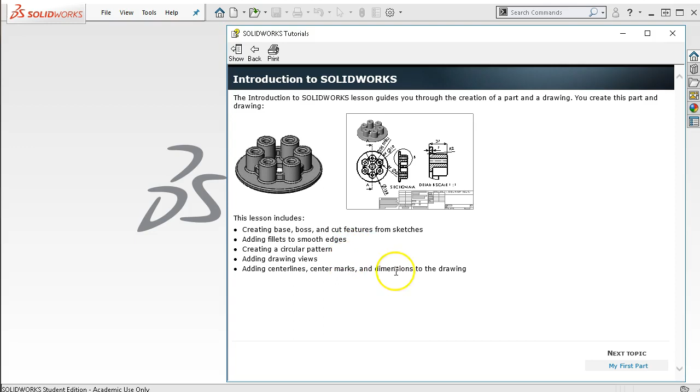The lesson includes creating base, boss, and cut features from sketches, adding fillets, creating a circular pattern, adding drawing views, center lines, center marks, and dimensions to the drawing. So they're going to take it through the process of creating the part.

So next topic, my first part. We're going to select units, pretty much what we've been doing in the lecture videos. Same type of process: units, millimeters, grams, and seconds.

Since we have set up a template, we can go into the millimeters. If you haven't set up a template, then you'll need to set to metric. All right, so opening up the part, fly that out of the way, file, new.

And if we're in the part, so let's see, my templates are over here, so there's the part inch. Let's assume that you haven't created these templates yet, so just use part.

And what we're going to check for to make sure that we're in metric is in the lower right corner, which is showing me that it is in inch, pounds, and seconds.

And the pop-up is just off of my screen. Again, with the YouTube 720 by 480, whatever, I'm only using part of my screen, so I hate when things pop up off of the usable area.

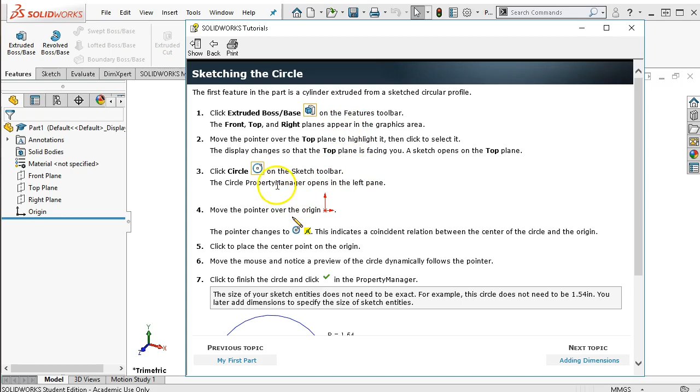They're going to go through the process of clicking on what you want to do, and then the planes come up and say, where do you want to start the sketch? I think my preference is to be in the sketch tab, pick the plane that you want.

All right, so they're saying to move this over the top plane. And then from a workflow standpoint, this is going to be your most efficient: right click on the top plane, go to sketch.

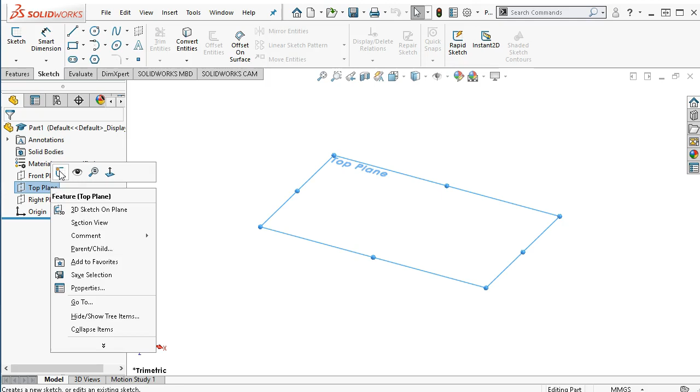Otherwise, we would go to sketch. It would give us the same thing as selecting the feature.

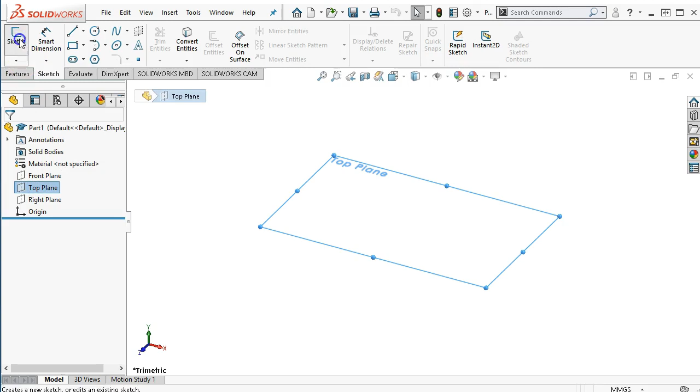And I didn't want the front plane, so I get to exit out of that and just discard the changes. Top plane, sketch would be a fourth way, since I'm throwing them all in here—to get into a sketch is to select the plane or the face that you want and then go to the sketch.

Let's see, is it up here? No. The one thing you'd want to watch if you're using the little pull-down arrows is make sure you're not selecting the 3D sketch.

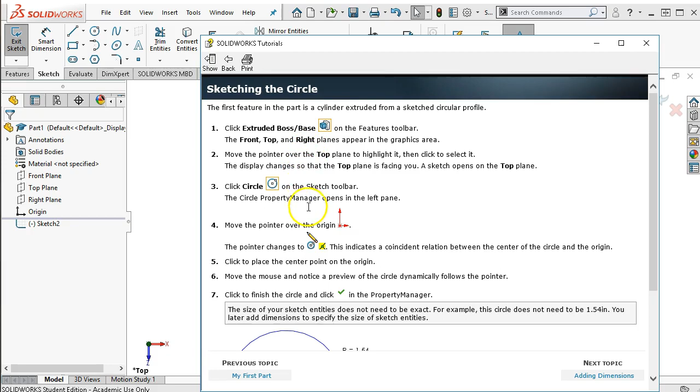They're going to have us go into the circle tool and over the origin. So we're in a sketch, we have the red origin. Long leg is vertical, short leg is horizontal. The pointer changes, showing you some of the sketch relations that you need to be looking for.

And we're going to drag out and then set the dimension later. So their note is telling us that don't worry about the 1.54, drag it some distance, whatever it ends up.

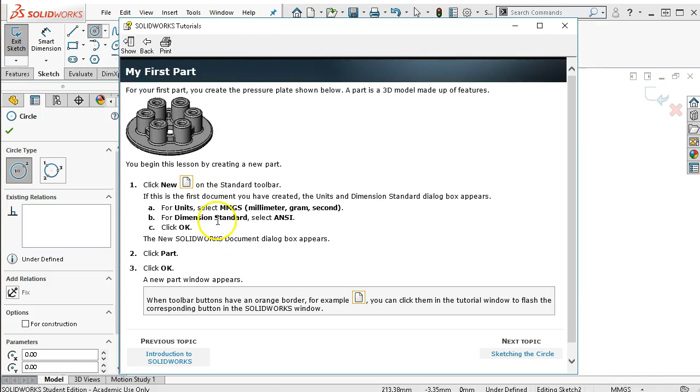And they're showing it in inches after they told us to go into metric. That's interesting, I gotta verify that. For units, select millimeters, grams, and seconds. Either that, or no, it's saying 1.54 inches, so. Alrighty then, editing as we go, proofreading as we go.

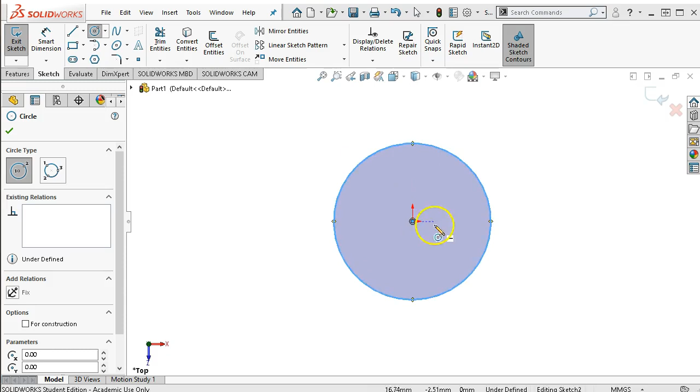Alright, so adding the dimension. Our shaded sketch contours is on, so notice that everything interior is showing us that we have an enclosed region. When we talk about contours and regions, the perimeter, the circle itself, is our contour, and the interior space that is showing as shaded is our region.

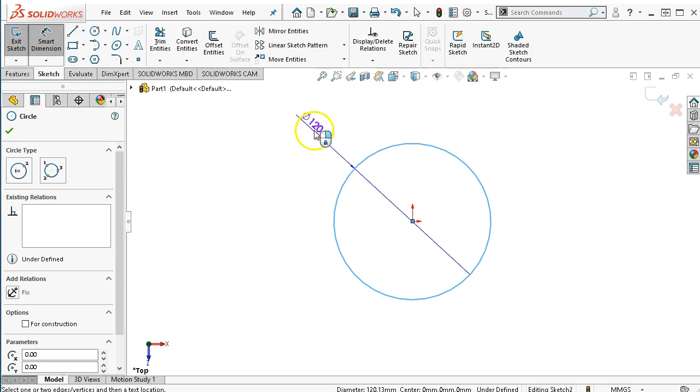I'm going to go ahead and click that off, go into the dimension, and they're telling us to do what I just did: smart dimension, preview the diameter dimension, modify, and 128 millimeters. So guess they did manage to get theirs changed over. Selecting on the circle, watch where you place the dimension because it's going to have some different results. I'm okay with the interior, so 128.

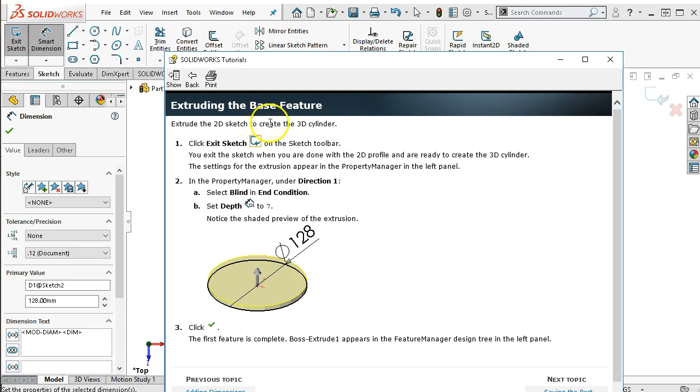Going into the extrusion. You do not have to exit the sketch to get into the feature. You can, and then ready to create the 3D cylinder sketch for the extrusion. If you went in through features, then you're automatically going to go from the sketch back to that feature. It's not always going to be the best selection to go in through the sketch and then directly into the features. So I have to make a little adjustment there.

All right, you exit the sketch and it will take you automatically into the feature. Since I did not do it that way, we're going to come over to features, go into the Extrude Boss Base. This will put me in the same location. And when they refer to the property manager, they're referring to everything on the left, so all of the parameters will show up on the left side. My screen may chop some of them off if I run out of room.

Under direction 1, we're doing a blind condition. And then setting the direction, it's going up, but it could also go down. So in our relation with the top plane, we would be in X and Z, so negative Y, so to speak. But it's not even having to do with the axes. It is more, are we going in a positive or negative direction from the plane that we are sketching in.

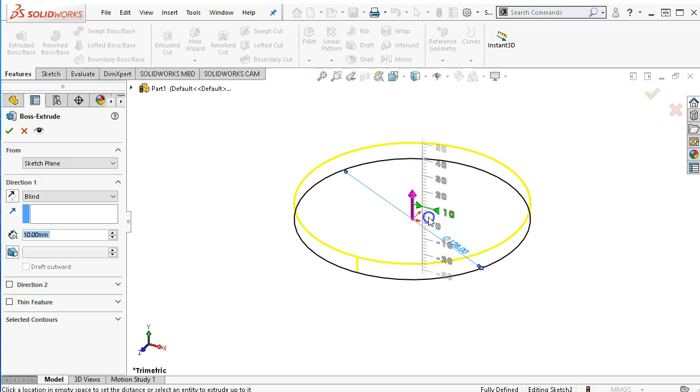So I reverse the direction again. I see that the arrow is going the right way. I can also grab that arrow and drag. Do not spend a lot of time dragging to an exact number. They want 7. But if you go closer to the scale, it will reduce one magnitude and get you a little bit closer. I really want 7, 6, 8, 6, 8. Not going to give it to me.

I'm done. All right, so I can either come over and if I double click in the area for the dimension, I can type in the 7 and be done. Most of the time I don't even mess with the scale. We go ahead and accept, and we're ready to go to their next step.

Saving the part. Good idea to save. File name. So this is their intro. They didn't, so pressure plate. And I'll go ahead and put this in my assignments folder. I don't really have an assignment for it, but we'll go pressure plate.

Fingers are not cooperating this morning, so save. And just off of the screen, my window is a little bit bigger. All right, fly back in.

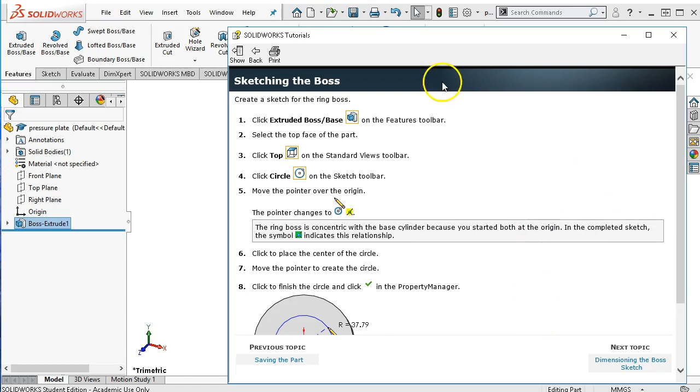Saving after the first extrude is not required. It is a good idea to save often, so you don't get caught. The system has become enough more stable that unless you're doing really crazy geometry, it shouldn't be that much of an issue with the computer locking up or crashing on the SolidWorks software.

If you watched any of my previous videos, you know that I work without a net for the better part of 30 to 40, sometimes an hour time block, and then, oh yeah, I probably should save. Don't do that. Save in regular increments and hit the Control S button regularly to save your parts.

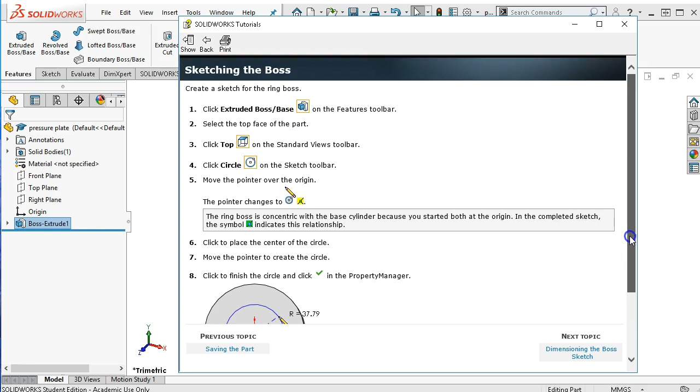Click Extruded Boss Base on the features. They're taking you in again through the feature, and this one is going to be the little raised up portion, so just kind of double checking here. They still want to do that on the top face. Keep in mind that I'm not grabbing the window.

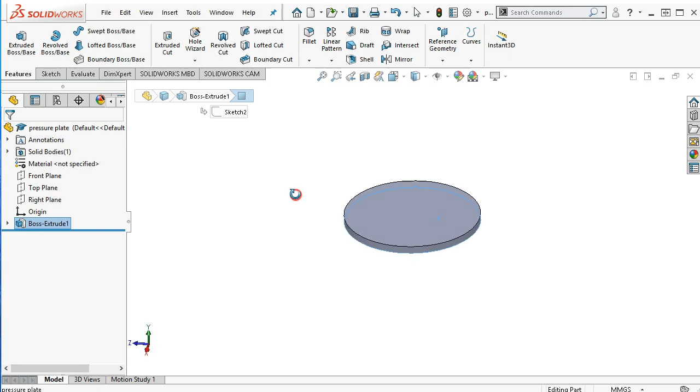If we grab the top plane, that would be the same as rotating over and grabbing the bottom of the boss that we just created. All right, so you have decisions to make.

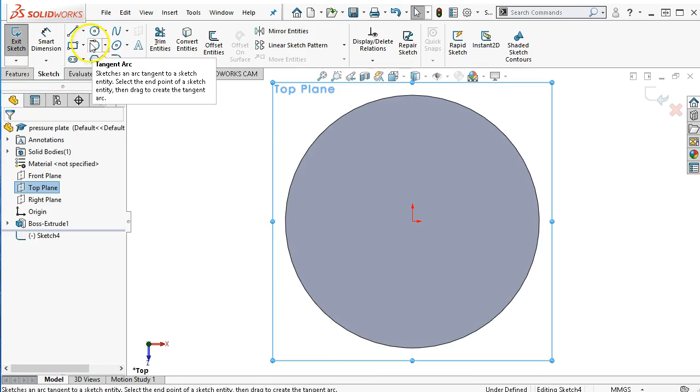I'm going to go with the instructions this time, except my fingers really wanted to do what I normally do, to follow my standard workflow. So, top plane, extruded boss base. We're going to draw the circle, and I don't think I elaborated on watching for the origin.

If you're following along with these instructions, hopefully you pick that up. Once we are hovering over the top of the origin, you're going to see the little yellow box. That is telling you that you're going to get a coincident or a concentricity. And we draw the first one. The ring is concentric with the base at the origin, placed at the center, and you can hit the check boxes.

I don't normally worry about these type of check boxes. I'll just go right into the next command. Smart dimension and 75 millimeters.

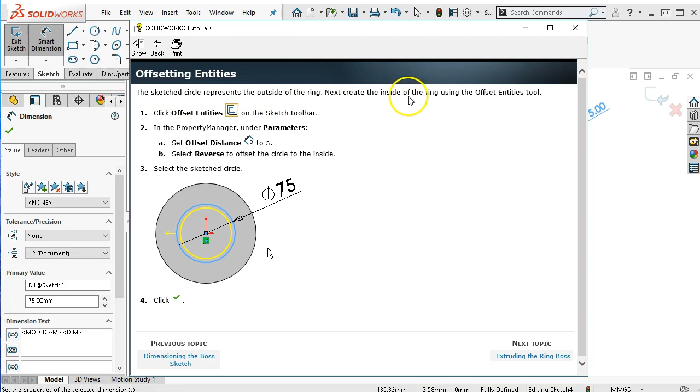All right, so let's go to the next. Double check my instructions. Modify 75. We're going to offset the entities. So we need to make sure that the circle represents the outside of the ring, inside ring using offset entities. And we need to make sure that the circle is selected.

All right, so right now I'm seeing black. I applied the dimension. If I go back to select or I hit escape, then the circle isn't highlighted. So I think that will be an issue.

Maybe not. Let's go ahead and offset entities, and we're going 5 millimeters. And nothing really happens. So even in their picture, they're showing the circle in blue. You only get that blue when it's highlighted.

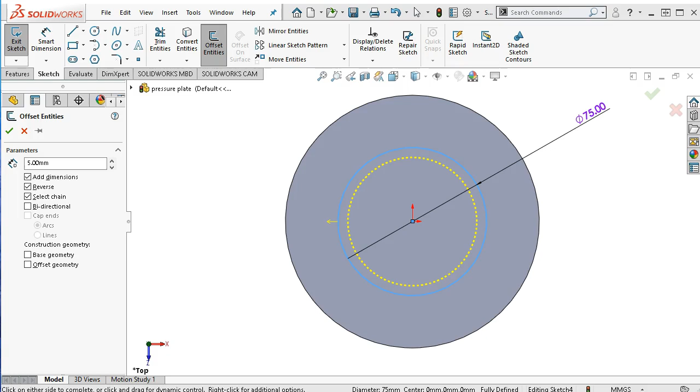All right, now that the sketch, all right, I know I'm flying these in and out. And then we have the 5 millimeters, dimension is showing to the inside. Now when we exit, accepting the sketch, it puts us right into the boss extrude, and I'm hitting the middle mouse button to rotate it over.

And with a direction of 1 to the first feature to 7 millimeters. Then I'm going to go to 12 millimeters.

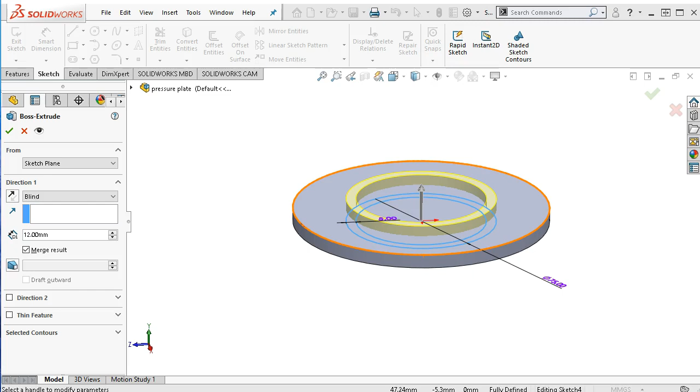And there again, based on what they just told me, or what I understood them to tell me, when I go back to the first boss, and it's showing me in the up direction, and we just opened a sketch on the top plane and we're going through 12.

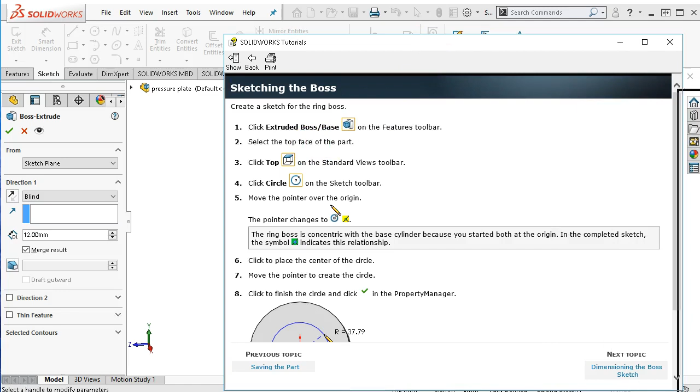Okay, we saved, we sketched, click the top, on the standard views, the circle on the sketch bar. So they really did tell us select the top face of the part. Oh, oops, that's what I get for not reading directions.

All right, so one of my favorite tools that doesn't get a lot of documentation is the Edit Sketch Plane. And it is currently on the top plane. I'm going to move it to the top face, and then that makes the adjustment.

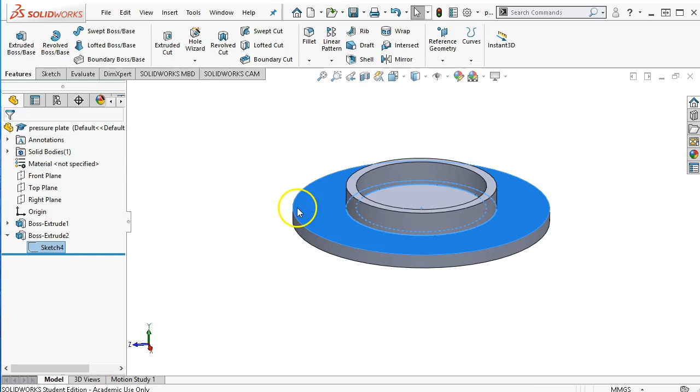All right, so Control 7 on the keyboard puts me into isometric. So getting in a little bit of a hurry and not reading all the instructions and comprehending what they're telling me to do is a little bit of a problem here.

So we have the ring, and we've clicked out of it, sketching the hole in the center. It's going to be an extruded cut, top face of the boss, top plane of the part. If the option to rotate into view is selected,

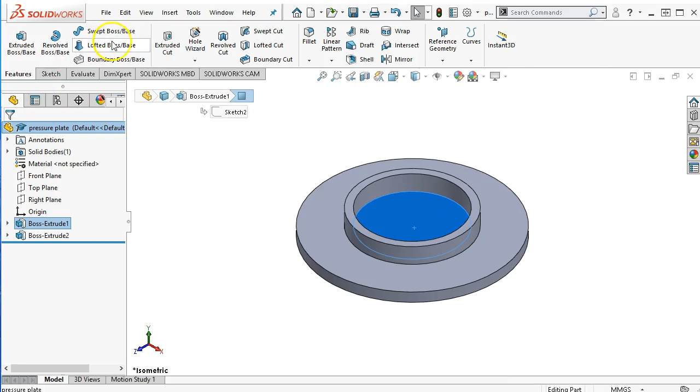let's go ahead and I'll try and stay. My fingers want to go to the sketch. Under your options and sketch, auto rotate view normal to sketch plane on sketch creation saves you having to hit that top on the standard toolbar every time. It will rotate into view. Sometimes it can be a nuisance and we would turn that off, but for the most part it's a decent way to go.

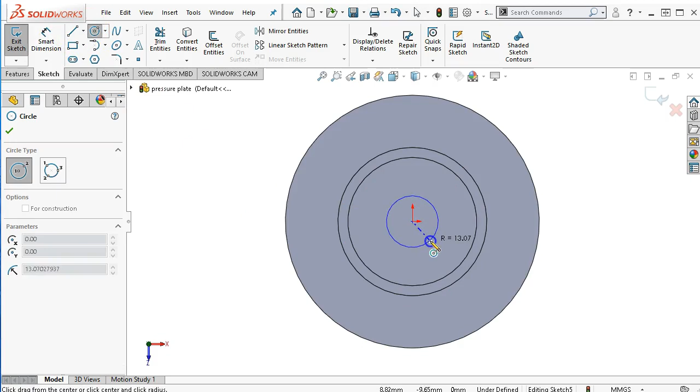So again, picking at the origin, dragging out some distance. We are concentric, coincident to the origin. We're going to place a dimension. Make sure I got everything this time.

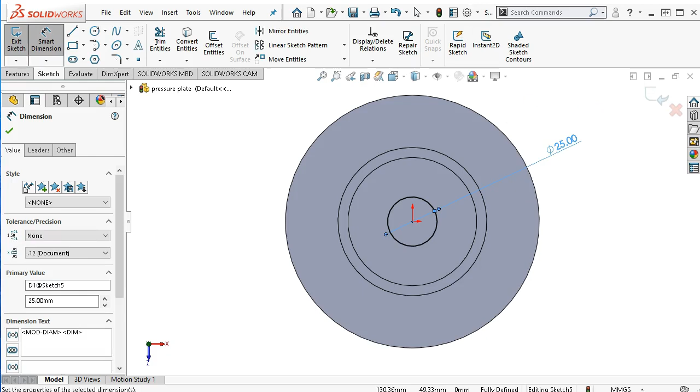Smart dimension, 25 millimeters. And in the modify box, 25. Creating the hole, we go ahead and exit the sketch.

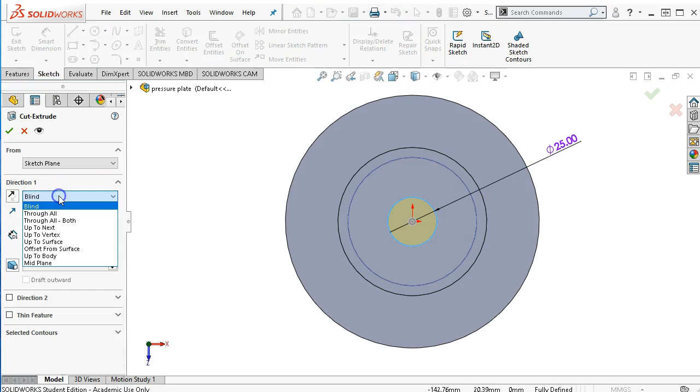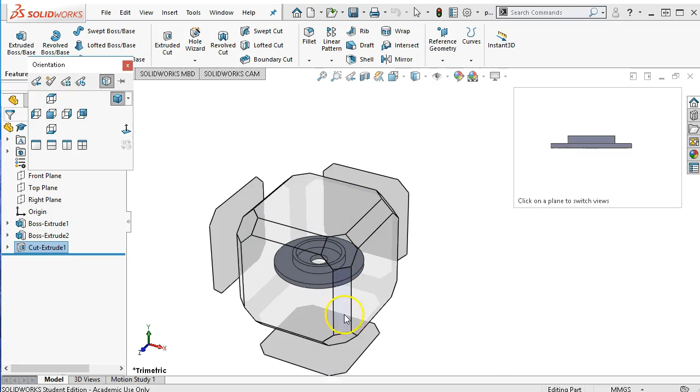Direction 1, through all for the end condition. I'll hit the middle mouse button to rotate. Trimetric's okay, but Control 7 on the keyboard will take me to isometric, which is close enough. What they're referring to on the standard toolbars is either the view orientation, with isometric, dimetric, trimetric options. By the time I do all of that, I can just hit Control 7. The other option is to hit the space bar, which brings up the same orientation view, and then you can pick views on the selection cube, like the back quadrant or some other quadrant. Otherwise, use keyboard shortcuts.

Going to add the fillets. Click fillet on the features toolbar, and we're already in an isometric view.

Under fillet type, make sure it's constant size, unless you've changed it to one of the others, it should be. They're going to give you the top face—oh, I got the edge. Okay, so face 1, and using the middle scroll mouse we'll zoom up and select face 2. The radius will be 2 millimeters.

Even though the preview isn't showing on this edge, we're set to partial preview, so once we hit OK, it will finish the rest.

Alright, sketching this tall cylinder extrusion on the top view, top face of the cylinder. Here's the expand line flyout on the sketch command feature, and we click Centerline.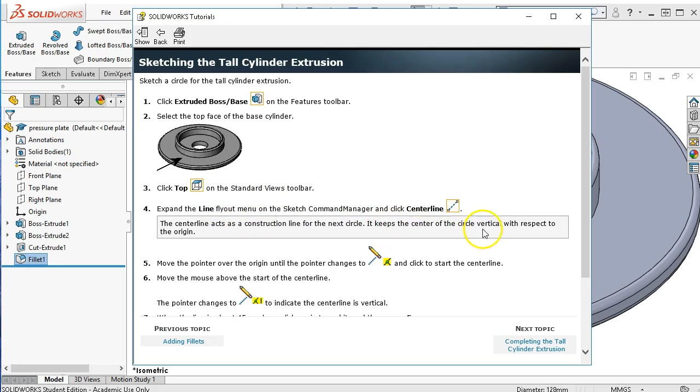It's a construction line for the next circle. It keeps the center of the circle vertical with respect to the origin. So they're starting at the origin and coming out some distance. When the line is about right, press select.

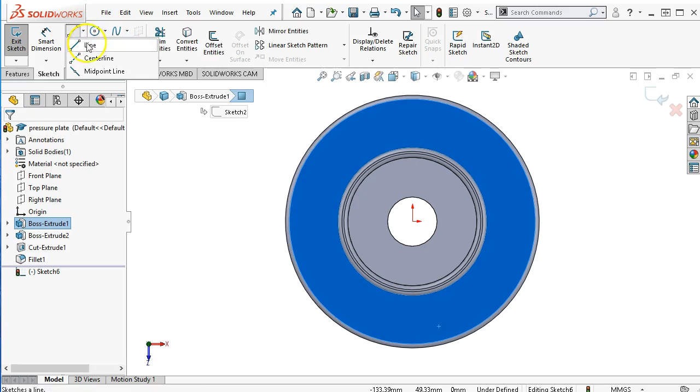I'm going to stay with my preferences. The flyout is referring to the arrow. Centerline, bring it out some distance—oh, need a dimension.

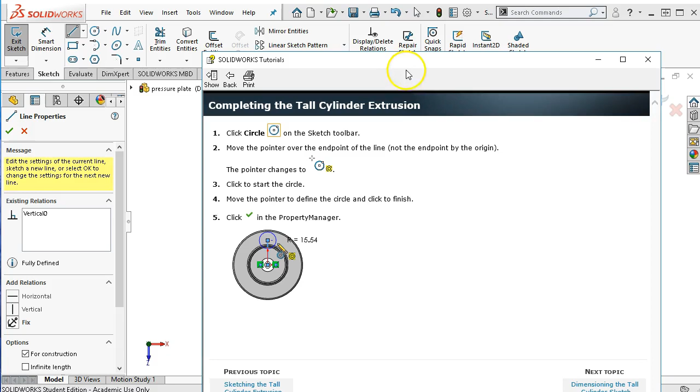They're going to attach the circle to the center line, not the endpoint by the origin. Start the circle and click OK in the property manager. Once we add the dimensions, it will start to tie this in, so it really doesn't matter if it's out here or out here—I'm just making sure it doesn't pick up any extra relations.

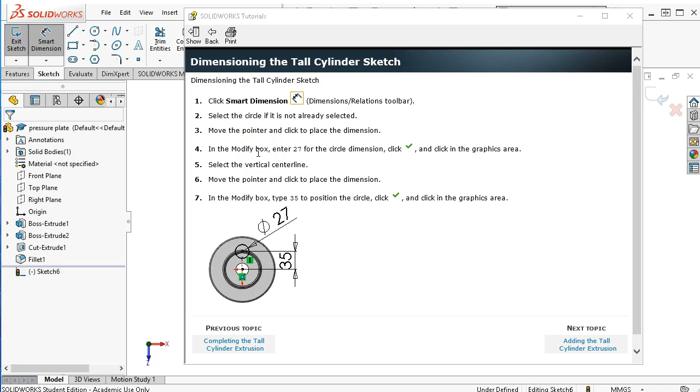So, dimensioning: click on the smart dimension, select the circle. If it was still highlighted, it will automatically start the dimension on the circle. Modify box to 27, then go to the vertical center line and place the dimension at 35.

Alright, mine wasn't selected, so I'm going to highlight the circle—27. We grab the center line—35. And amazingly enough, that looks like it puts it right at the center of the boss.

If the center line did not have a vertical relation on it, and we drew it and it got off a little ways one way or the other, then we'd have to select the center line and go to relations and click vertical. When you're dragging, that little yellow box comes up automatically to indicate it's vertical, or it was inferred to be vertical.

We're going to exit the sketch and it's going to put it into boss. I'm going to go extruded boss base, and we're going to set direction 1 to 30 millimeters.

Thinking about these fillets as a general practice, I would not put the fillet in at that time—I would have waited till the end. Fillets have an uncanny ability, if I pull a dimension off this edge and change it a little bit, then I'm really dimensioning off of a non-toleranced feature. Fillets, no matter how close you think you're going to get to plus or minus 5 thousandths, turn out to be what they turn out to be—same with chamfers. So if that geometry drives other geometry in the model during manufacturing, it can create other problems. So I would put that at the end.

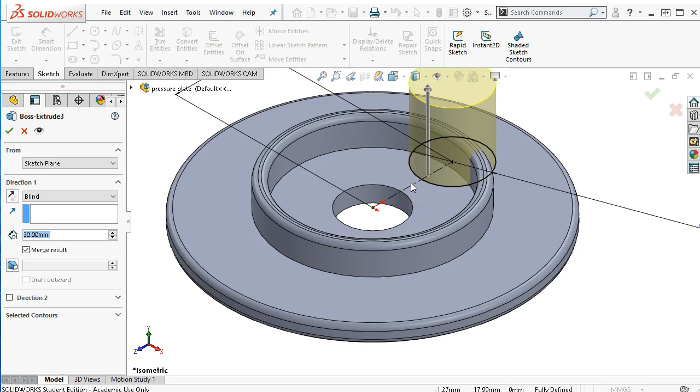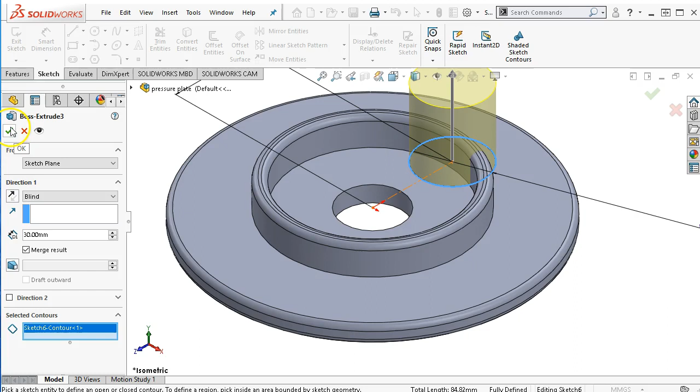So the center line doesn't participate. You can certainly select the contour, but as long as that is a center line, it's not participating in the creation of the feature, so they're actually showing it as a line in the exercise, which is a little annoying. Selecting the contour, since as soon as you have intersecting, overlapping, or disjointed geometries, the selected contours dialog will come up automatically, and we'd have to pick the contour, our circle, as opposed to the region. Actually, the region would work here too. But center line, you shouldn't have even seen that.

So, sketching the tall cylinder hole. Now we're going to the extruded cut and top face of the tall cylinder sketch. Top face, click on the circle, move the pointer, and what it's telling you is move the pointer to the edge of the tall cylinder and leave it there until the center point appears. If you drag slowly, it will also show up. Move the pointer over the new center point, click to place the center of the circle, move the pointer and click to finish the circle.

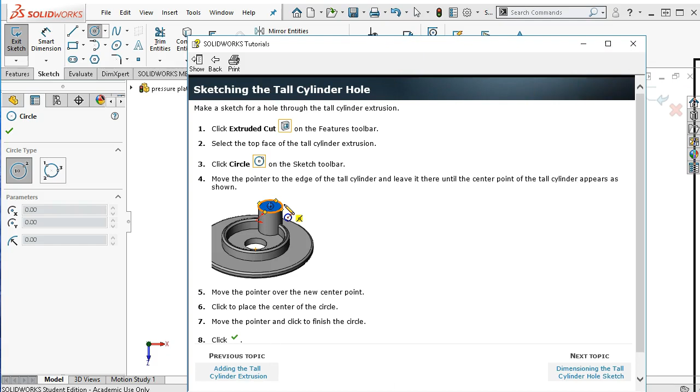So what that means is as I drag along that edge, I'm going to see quadrants 0, 90, 180, 270, and the center of that circle. If I drag to that reference, I'll see the little yellow box showing me coincident. I click and drag and place the circle. Probably a good time to mention that I'm a click dragger, not a click clicker. If you click, let go, and click again, it has the same effect. It just depends on which preference you have for setting the geometry.

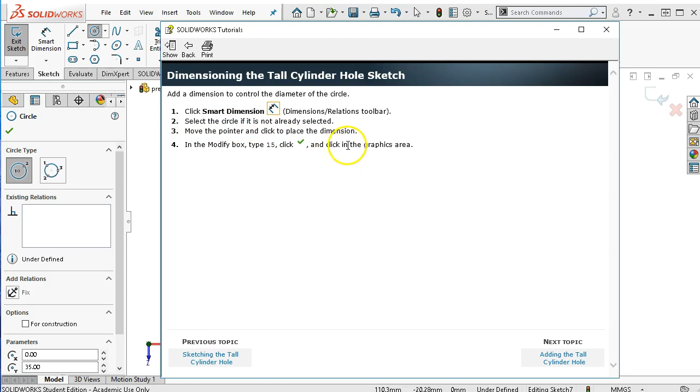All right, our smart dimension. If the circle isn't already selected, we're going to pick the dimension, place the dimension, or pick the circle, place the dimension, and then type 15. This time the circle is selected. When I go to smart dimension, it cleared something, so we're just going to pick it and hit OK.

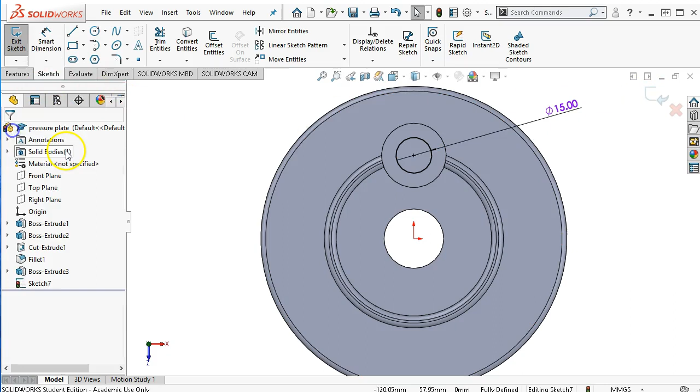And then if I exit the sketch, because again I'm pre-selecting, I'm going into the sketch, then with sketch 7 selected here and the circle selected in the work area, I'm going to go to the extruded cut, and again we're going to have a through-all condition. Go ahead and hit OK.

All right, so we're seeing the geometry start to come together. Adding fillets. Again, I'm not thrilled about adding fillets midstream. I would rather get them all at once at the very end. Interesting that they're also picking the bottom, but okay.

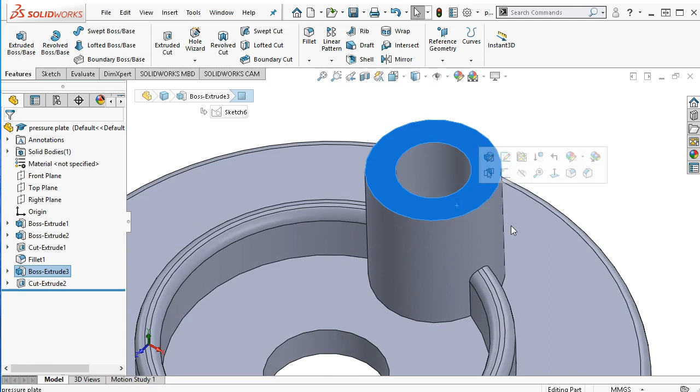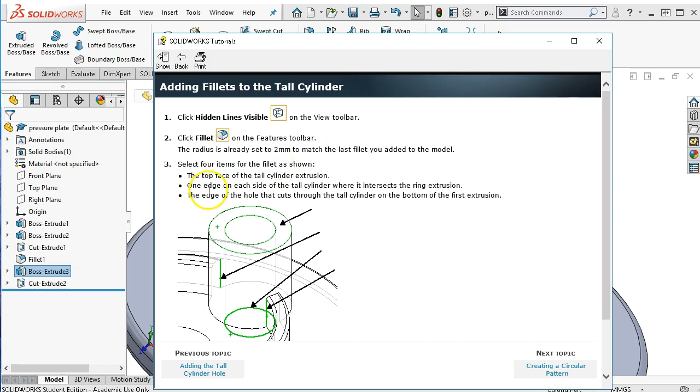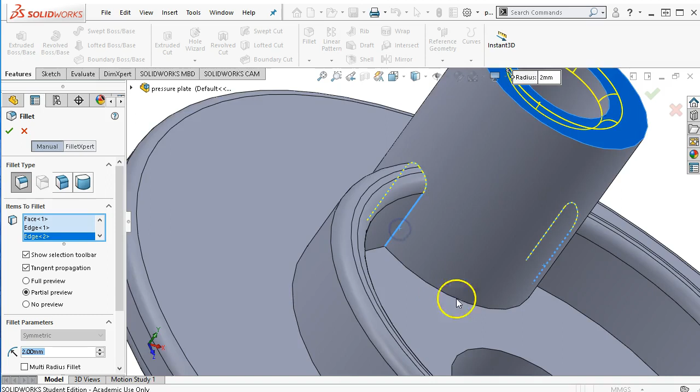So when you pick a face, the connected edges, inside and outside, are both going to be selected. Radius was previously set to 2. And what they're not telling you... alright, okay. So with pre-selecting, I have to hold down the control button and then select the additional items. If I'm cleared out and go into fillet and see the blue box, then I don't have to hold down the control button. So, we are set to 2 millimeters. It's showing me the preview, and I'm using the middle mouse button to rotate, and we go ahead and hit OK.

All right, so fillets up and over and all around. Make sure that we're seeing something close here.

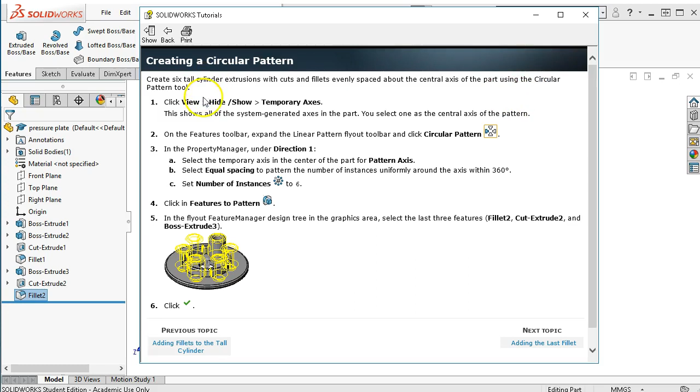All right, a circular pattern. Create the 6 tall cylinder extrusions. Click View, Hide/Show, Temporary Axes. There's two ways to get to that. And keep in mind you don't actually have to turn the temporary axes on if the geometry is such that you can pick an interior or exterior cylinder. That will suffice for the pattern.

So what they're referencing is View, Hide/Show, Temporary Axes. If you go to the work area, the top bar, it'll be the second one over, second one down, and we'll turn it off that way when we get to it. All right, so temporary axis is on. So the View pull-down, Hide/Show, or from the Hide/Show. Oh, one more mention on this: make sure that you're picking the arrow, not the eye symbol, because that will turn everything hide or turn everything show.

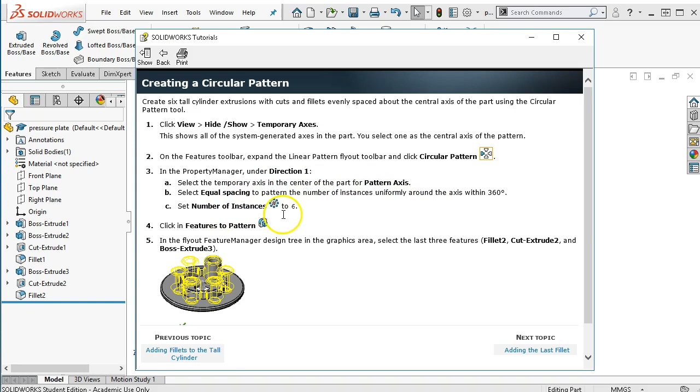We're going to pick the linear pattern flyout and go to the circular pattern. In the property manager, we set direction 1, pattern axis, equal spacing, number of instances, and somewhere in there we need to pick the temporary axis or the graphic. The flyout is the arrow underneath linear pattern.

Let's go ahead with the feature flyout, let's see number of instances. So it looks like they tell you to show it, and then if I'm reading this correctly, okay, there's the select temporary axis, and that goes in the first box.

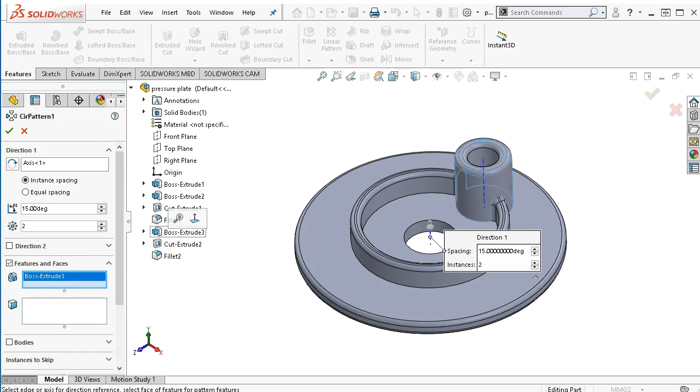And then for the features, we do the flyout, and we're going to do boss, cut extrude, fillet 2. There's going to be equal spacing, 360 degrees, 6 instances. Okay, we go ahead and accept.

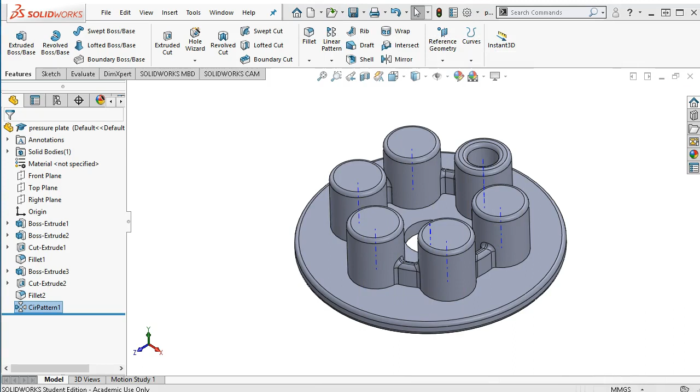And apparently it missed one. Maybe, maybe not. We'll double check here. So getting back into it, I can right click on the feature, edit the feature pattern. It's showing it there, oh, but it's not showing up there, so it did not select. I'm not sure why that is, but we go back, add it, and okay. So I'm through with the temporary axes, or at least I think I am.

So hide/show, little down arrow, temporary axis. I'm getting my unsaved document warning. It's been 20 minutes, so at the very least I'm going to hit Control S.

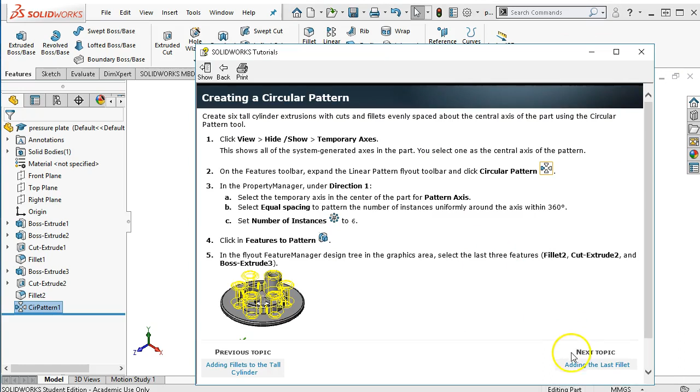And then adding the last fillet will be around the interior and exterior, not to include the edges of the center hole. And that's also going to be a 2mm fillet.

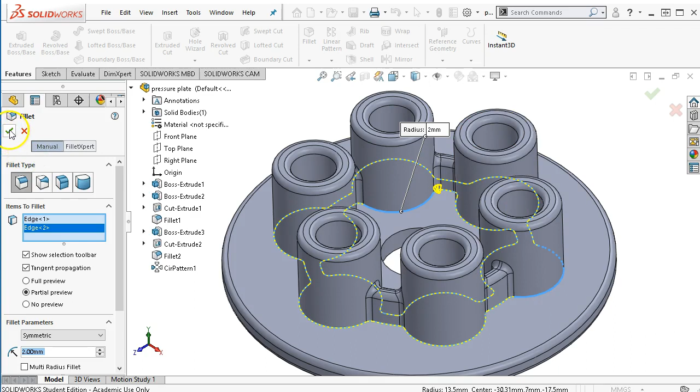All right, so picking an edge, and an edge, I can go to fillet, which is the same as going to fillet, items to fillet, and then I don't have to hold down the control button. It's showing me the preview and where all the fillets are going to go. Hit OK, and we hit save.

All right, so they didn't leave out as much as I thought they did or suspected they did, but they really didn't provide a wealth of explanations to some of these additional items.

So if you want to continue on into the drawing, let's go ahead and take a look and see what that goes with. All right, my first drawing, 3 view, some details. We're going to create a drawing.

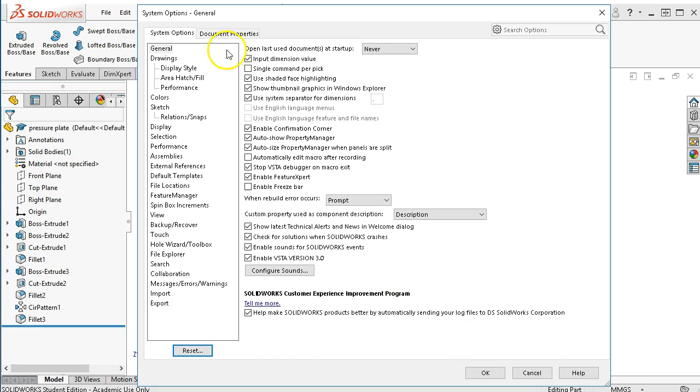So they want tangent edges removed to hide transitions between. Okay, let's see if that is set. So referencing the options, move that up just a little bit. Drawings, display style, tangent edges are shown as visible, and we're going to select removed. Okay.

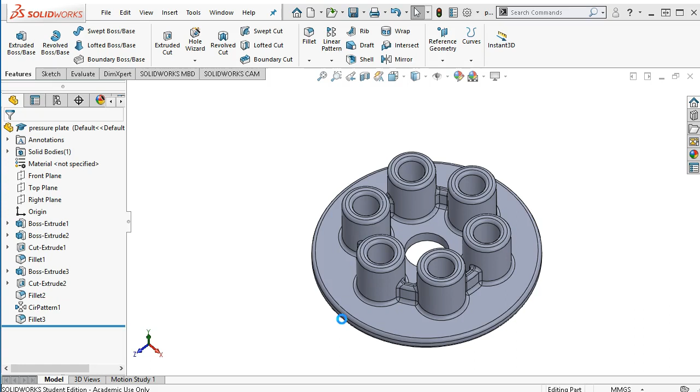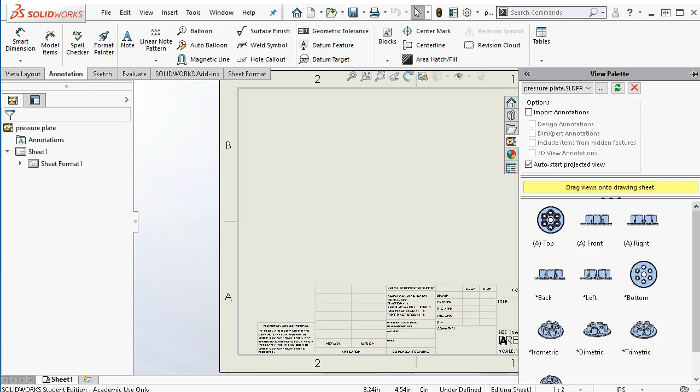We're going to make a drawing from the part, so File, Make Drawing From Part, which is the same as going New, Draw. And click OK. We're going to go with an ANSI A size. So apparently it found, now it looks like an ANSI A size. So either it's set as the default template, or... okay, SolidWorks creates the drawing.

Make sure only show standard formats. So we'll go back and we'll take a look at that since it didn't pop up on mine. Tools, options, document properties, insert view, clear center marks, holes. I kind of like those. Again, it's personal preference, your choice if you want to clear those or not. I'm going to leave them on.

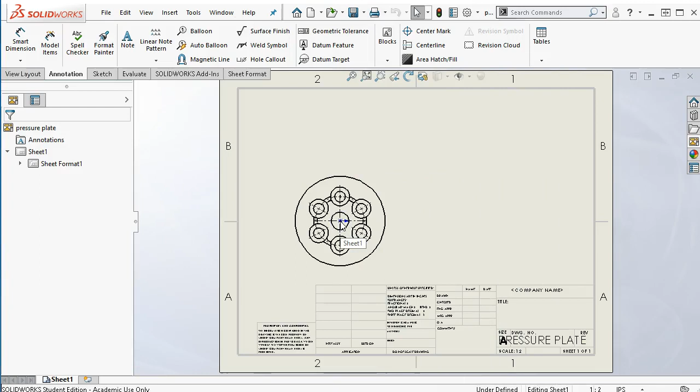On the view palette tab, this came up automatically, and it is auto starting the projected view, which is here. And we're going to drag the top view, which is the primary view, and hidden lines removed. So we'll see if those are defaults. All right, so top comes in. So there are my center marks and marks for the geometry.

I'm going to go ahead and, well, maybe not. We place it in the first corner. They want to create a section view, so since they jumped into section view, we're going to go ahead and hit that check mark.

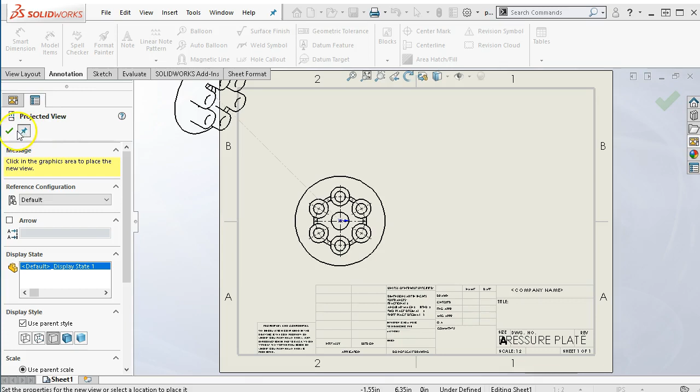And I don't know if theirs was a little bit smaller or not, but under the view layout, we have section view. All right, so hidden lines are removed, at least as far as I can tell. And on the drawing toolbar, it's the view layout, so we're going to go to section view in the command manager.

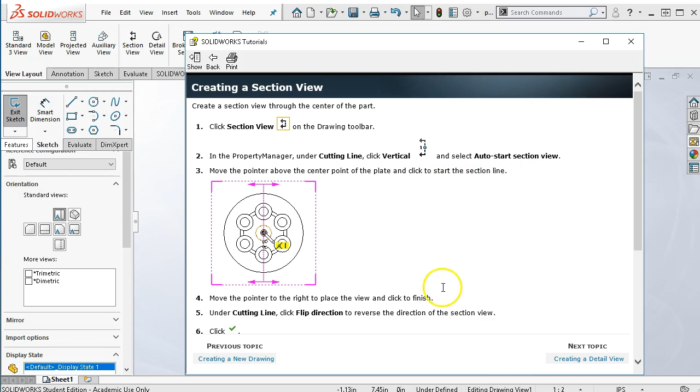Under the property manager, set it to vertical and then auto start. Place it, and then we'll see what it looks like. All right, so click on the section view. It's in vertical. I'm going to place it on the origin so that it's centered. I don't need any jogs or angles, so we'll go ahead and hit OK.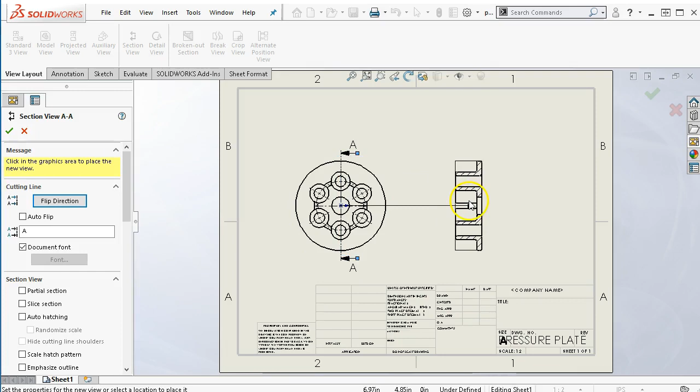And we'll drag this one out. All right, so if this folds up, this would be folding into the correct direction, or at least it looks like it.

Now, I think they reversed theirs. I'm not sure why they reversed it. If this is the top view, and we're looking at it in this direction, then this folds. That makes more sense to me, so stay with what makes sense to you.

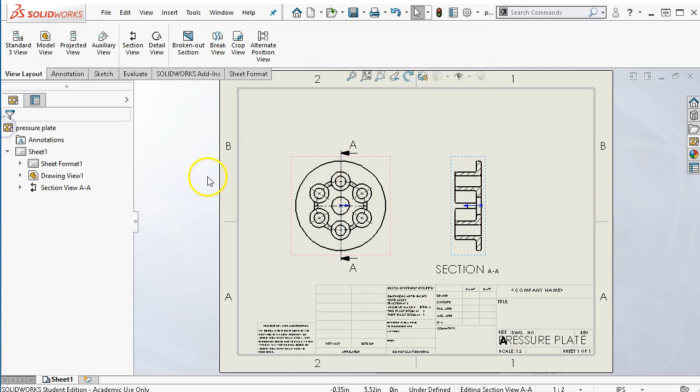A detail view, and they're going to find something in here we're just going to place. Looks about like that. And then there's our detail view, so when you click on it, it is 1:1. Oh, now that might be part of it, I'm still in inch, pounds, and seconds on my drawing toolbar. I guess I skimmed over that instruction. We'll go ahead and hit save.

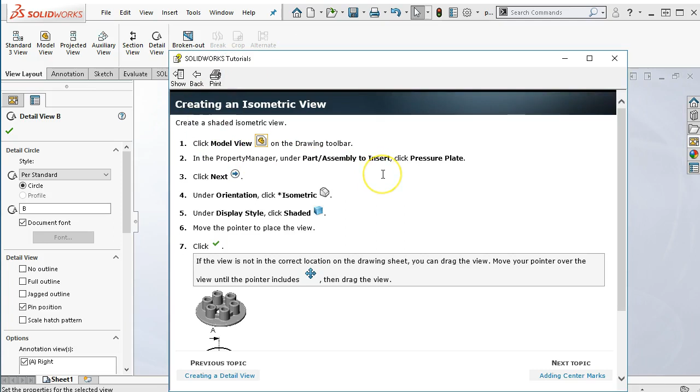Push pressure plate drawing. An isometric view. So it's saying go to model view, under orientation. Okay, so model view, my pressure plate is selected already. Hit the next button. And then we're going to pick the isometric.

And then they want it shaded. I'm not a big fan of shading for print documents. And we'll place it somewhere, and we'll drag it around.

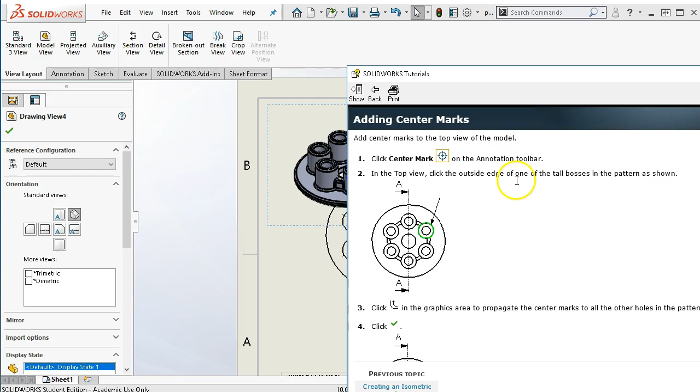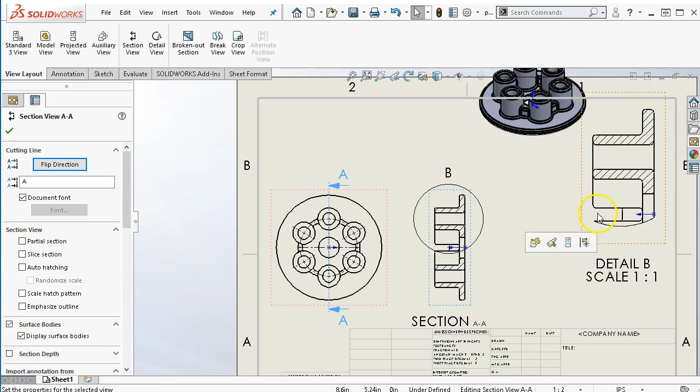Now, as much fun as it was, maybe they wanted their center marks. Nope, their center marks pretty much look like mine that came in automatic. So I don't know, it's a toss up there of turning the center marks off and then having to put them in yourself, or leaving it on and having the software create them for you.

And I'm just kind of dragging everything to where it doesn't look as cluttered. Alright, center marks, and then they propagate, and a center line. You're going to put center lines on the detail, so clicking the view, going back to annotation, coming over to center lines. Let's select the view. Alright, so that one gets it. We go ahead and hit OK.

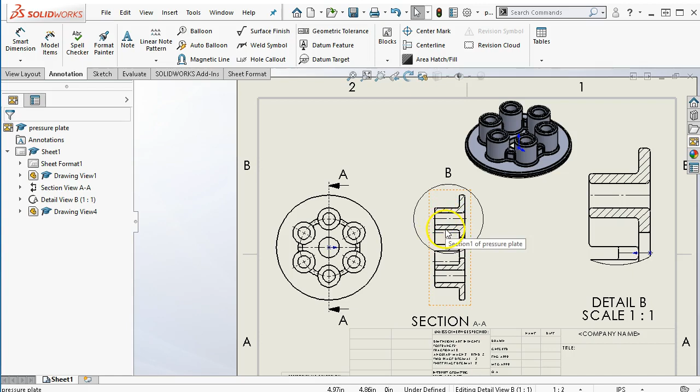Center line, select the view, and OK. So since it's doing all of them, this center line refers to the interior radius. So we don't want that one, it's confusing. I'm going to go ahead and hit delete on the keyboard. All right, we could probably do that here, except they're showing - nope, they're not showing up. The other thing would be to select the object.

Let's see if that works. So clicking on the face, center line. Nope, that was a center mark. So if I go from edge to edge, then I could put them in individually.

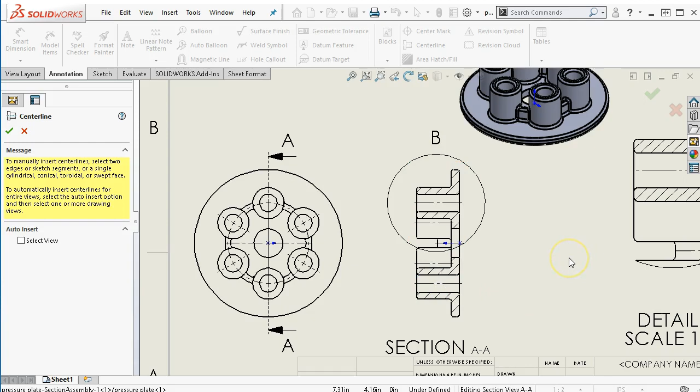All right, placing dimensions, options, units. Well, let's go the shortcut and just go millimeters, grams, and seconds. The only thing here that we'll have to check out is, are we in 2 or 3 decimal places coming over from inches?

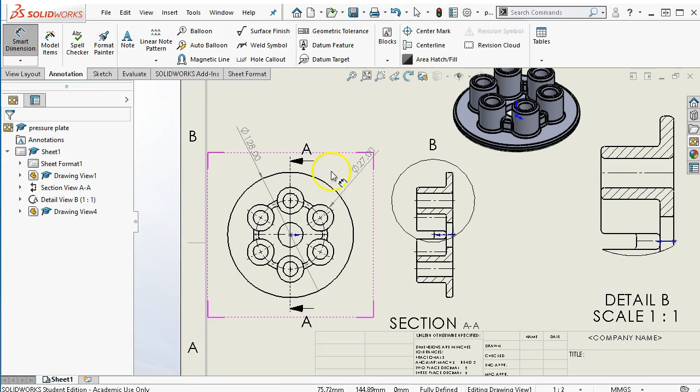All right, so a few dimensions. I don't know that I want to dimension all of this, so we'll pick a few. And 27, and there was a radius. No, still got the radius. So zoom up. There we go, 15.

And it would appear that I'm in ISO. I didn't change my standard over to ANSI. And so is theirs. Edge of the circle. So they put in a handful of dimensions.

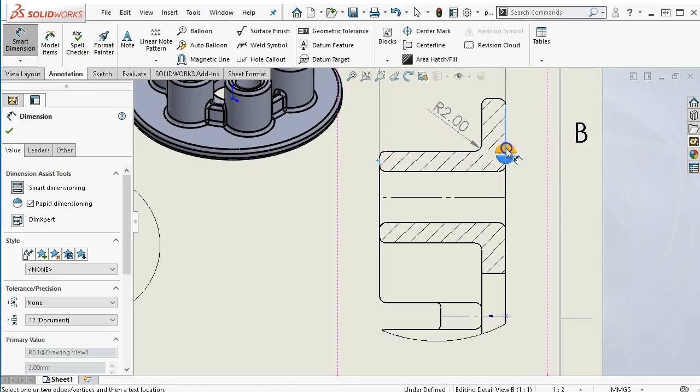And then detail dimensions, so I'll go ahead and put the 25 on there. There's certainly more and details that we need to pick up. So the fillet of 2 millimeters, and then I want to reverse the arrow, so I'm clicking on the handle right there at the end of the arrow. Let's see, dimension of 37, so from edge to edge or object to object. And 7. All right, so those are available to work with.

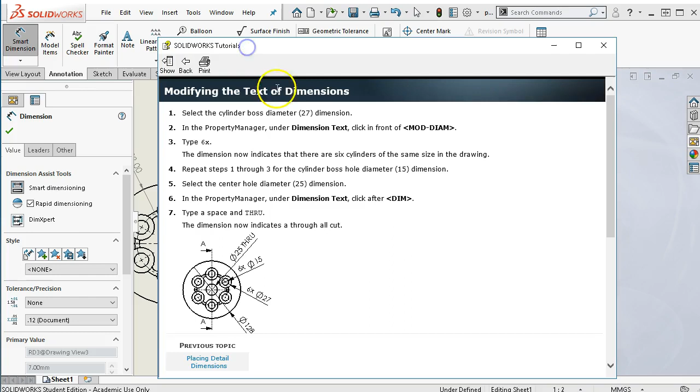Modifying text. Let's see. Select the cylinder, boss, and type 6 times. All right, so 27, it's referring to the dimension text. Or let's right click and select. I'll highlight, and then you also get a pop-up box. And I think that's a text on top. That would be a text in front.

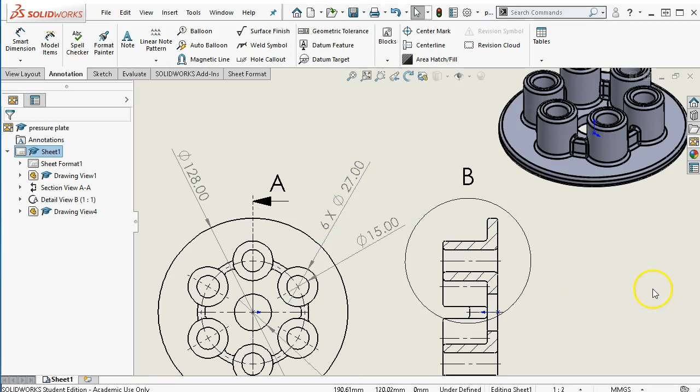6 times diameter, and we see the preview. And when we hit enter or click out, then it gives us the dimension, and we can reposition it, bring it back a little closer. All right, so hit save. Again, there's more things that we can do to this geometry, to our detail drawing, and then at some point we'll modify the template as well.

All right, so when you're going through these, realize that there are some gaps. There's some explanations that I think that they could do better, but that taken with a grain of salt. The project is pretty decent. It will get you started, and we'll go from there.